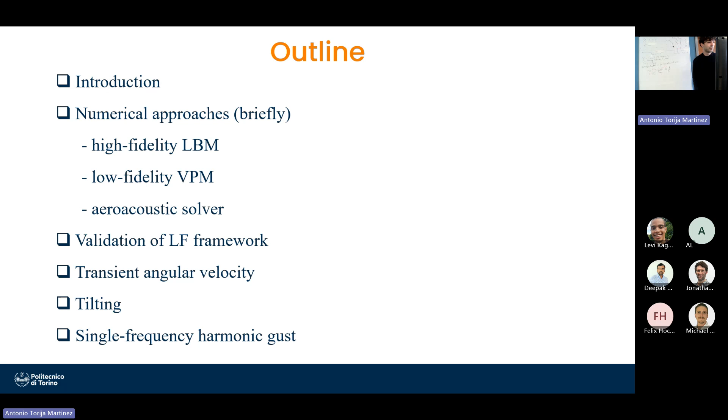I will start with a brief introduction and a description of the numerical approach we used in our calculations, the validation of the low fidelity framework, and then we will see some validation with respect to transient angular velocity conditions, tilting, and a single frequency harmonic gust for a single propeller.

Nowadays there's a lot of interest in urban air mobility, whose main goal is to improve mobility in cities with many applications ranging from air taxi to delivery by means of electric vertical takeoff and landing vehicles, which are vehicles capable of takeoff and landing in small areas, usually composed of multiple propellers.

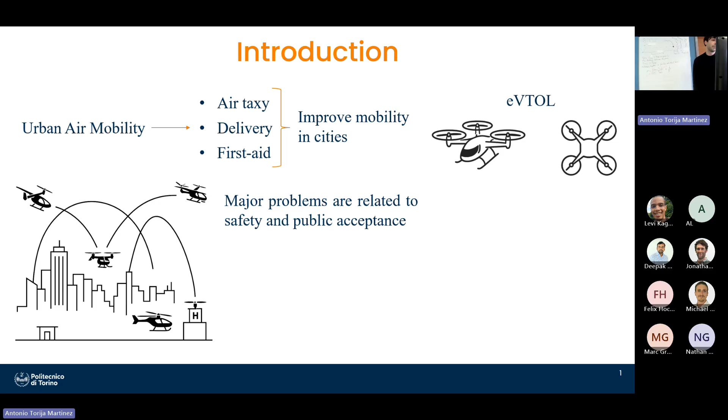However, in order to see a viable market, this relatively new concept needs to face and overcome some important challenges related to safety and public acceptance. In particular, there are many reports that suggest noise highly influences public acceptance.

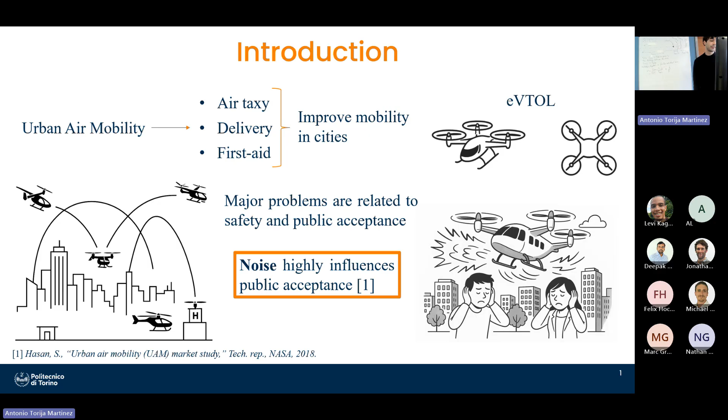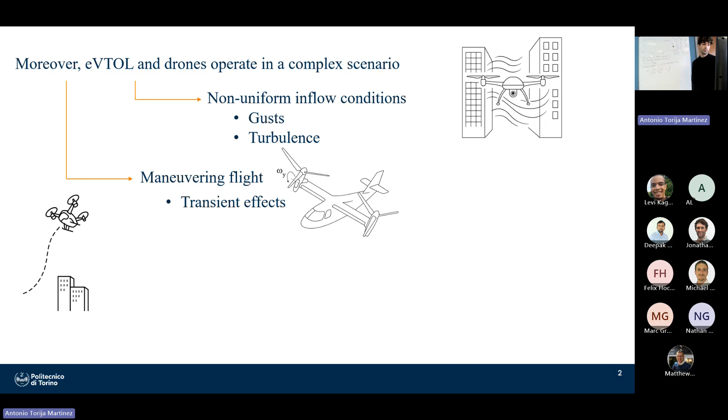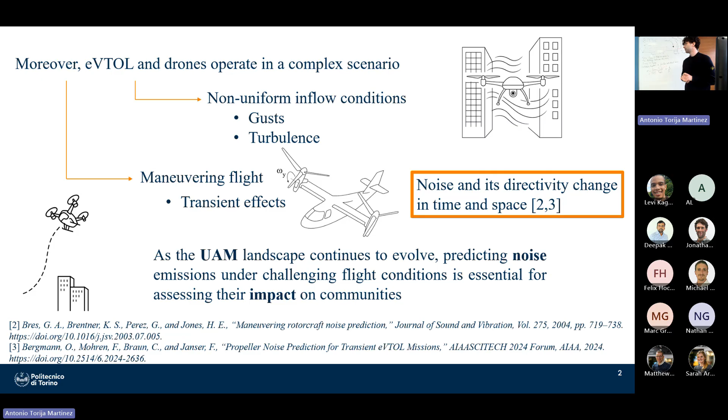Moreover, because these vehicles operate in a complex urban scenario characterized by non-uniform inflow conditions such as gusts and turbulence, and in maneuvering flight that cause transient effects during flight, which finally change the noise and its directivity in time and space, it's important to predict noise under these maneuvering and unsteady flight conditions in order to assess their impact on communities.

There are many numerical approaches adopted for this, ranging from low fidelity to high fidelity. High fidelity methodologies are based on high fidelity CFD simulations with, for example, large eddy simulation, direct numerical calculations, URANS, and lattice Boltzmann approaches, while the low fidelity approaches are based on simplified aerodynamic solvers and simplified versions of aeroacoustic solvers.

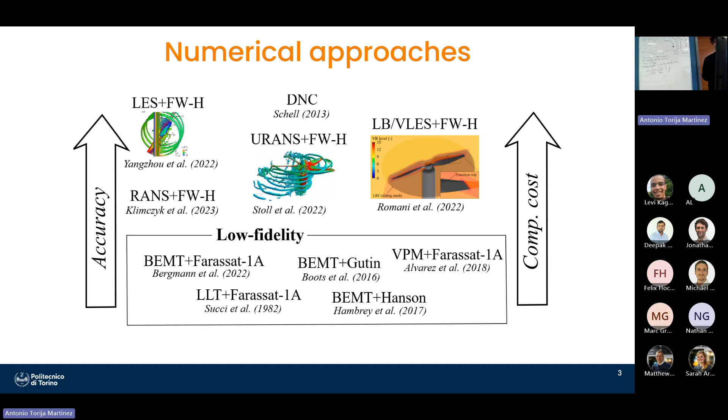Clearly, increasing the accuracy will also increase the computational cost. For this reason, it is infeasible to study complex maneuvers with complex numerical tools. I will describe just briefly the lattice Boltzmann very large eddy simulations.

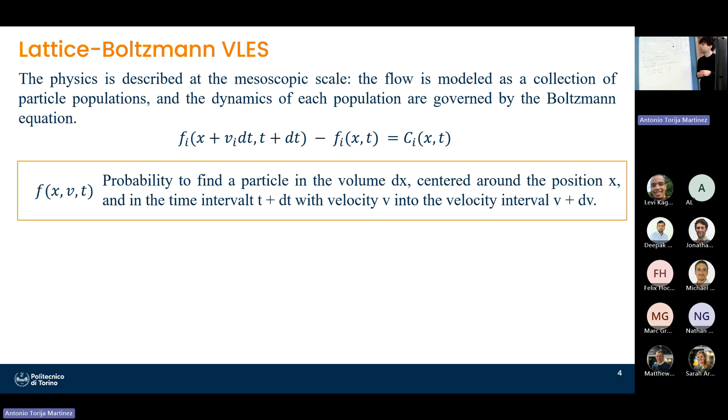With this approach, the physics is described at the mesoscopic scale. The flow is modeled as a collection of particles, and the dynamics of this population are governed by the Boltzmann equation. On the left-hand side, we have the probability to find a particle in a volume dx centered around position x, in the time interval t plus dt, and in the velocity interval v plus dv. On the right-hand side, we have the collision operator, which is modeled with the equation below.

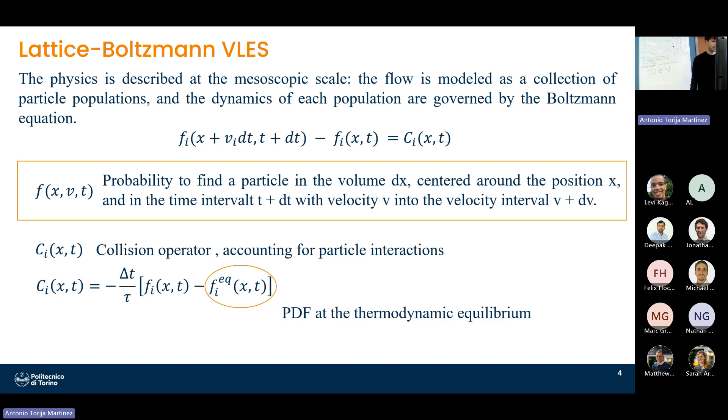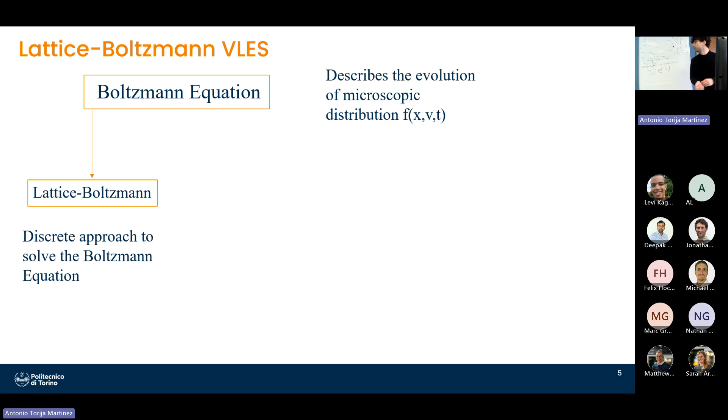So to understand the difference with Navier-Stokes equations: with the Boltzmann equation, we describe the evolution on the microscopic scale. The lattice-Boltzmann is the discrete approach to solve the equation, while the Navier-Stokes equation describes the evolution of macroscopic fields, such as velocity, pressure, and temperature, through the governing equations of fluid dynamics, which are the conservation of mass, momentum, and energy.

We can link the Navier-Stokes to the lattice-Boltzmann if the Knudsen number, which is the ratio between the microscopic scale and the reference length of the problem, is much less than 1, so you can use the continuum assumption. This is usually done by asymptotic expansion, so from the Boltzmann equation we can get to the Navier-Stokes equation under some constraints.

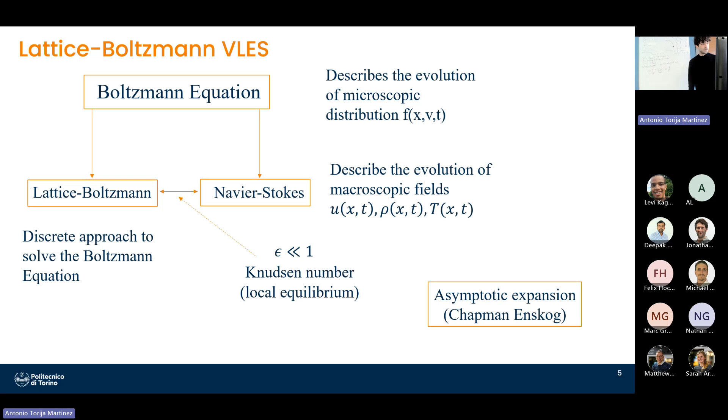Regarding low fidelity, variable fidelity methodologies, we have the vortex particle method we adopt in our low fidelity framework. This method describes the particles with a Lagrangian approach that tracks the evolution of the circulation of the particles.

Basically, it discretizes the Navier-Stokes momentum equation in its velocity-vorticity form, so it becomes like a balance of angular momentum. On the left-hand side we have the evolution of the circulation of each particle, and on the right-hand side we have the convection, contraction, and expansion of the particles, the effects of multiple particles on each other, and the effects of dissipation with the advection and strain pairs.

In general, we use an open source vortex particle method. It's a reformulated vortex particle method because it adds some terms that enhance the continuity equation, and so the balance of angular momentum, and also adds the subfilter model, which is the last term on the right, which can model the dissipation of the vortex.

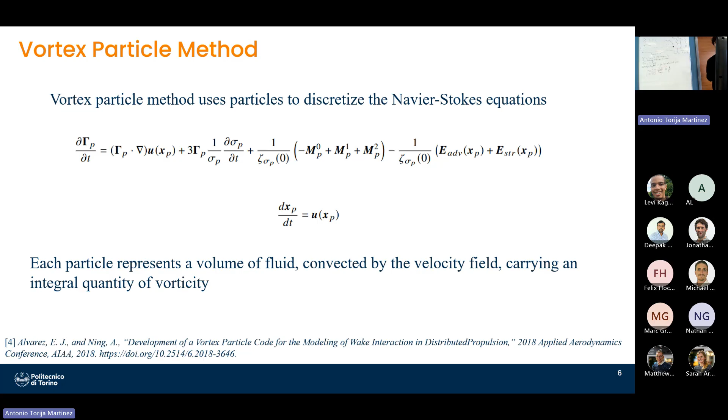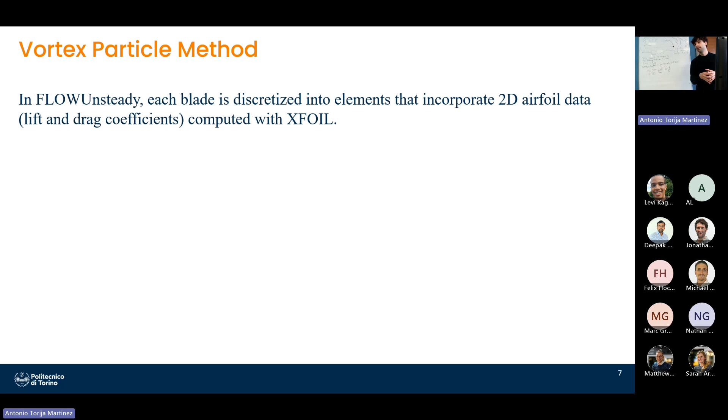In FLOWUnsteady, each blade is then discretized into blade elements that incorporates 2D airfoil data, such as the lift and drag coefficients. And then with the Kutta-Joukowski theorem, we can reintroduce this circulation in the flow field based on the load distribution on the blades.

Clearly, the high accuracy of the method has already been validated a lot in the literature with different test cases with multiple VTOL designs, but its high accuracy and low computational cost makes it a good solver for the VTOL design and study of different types of architectures.

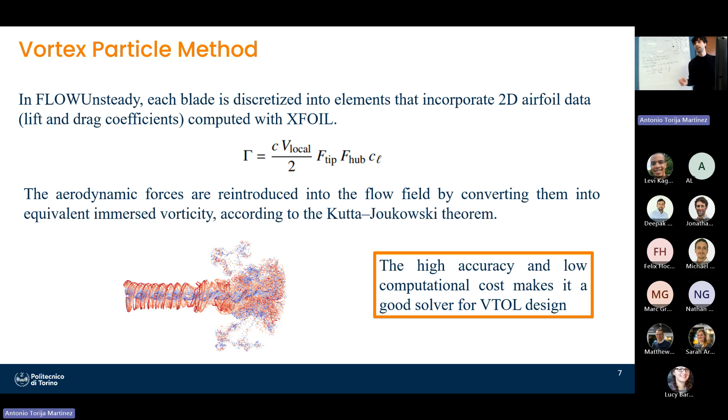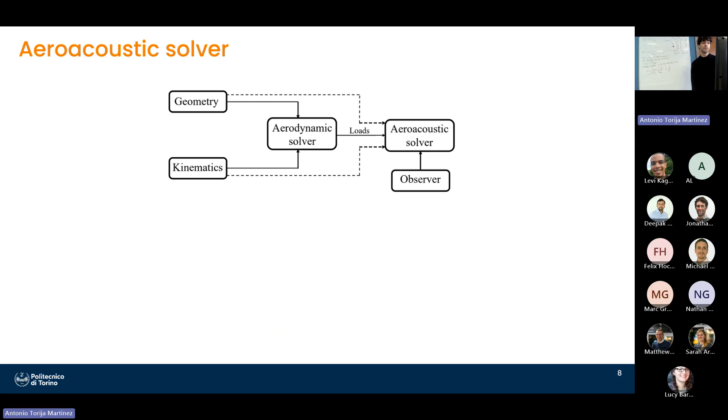Then we couple the aerodynamic solver with an acoustic solver we developed in-house based on the Farassat formulation. The Farassat formulation is a time domain approach. It's based on the Ffowcs Williams-Hawkings analogy for a compact dipole monopole source.

Basically, we evaluate the integrands at the retarded time, where we have three main time grids: the emission time grid, where the signal is emitted from each blade element; the observer time grid, which is the time at which the receiver perceives the sound; and then the retarded time, which is reconstructed solving this implicit equation. So basically, fixing the observer time, you can reconstruct where the blade was when it emitted this specific signal.

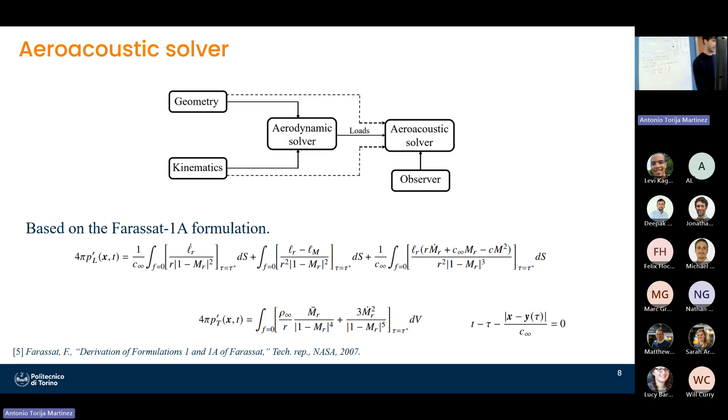Then, for considering also the kinematics of the solver, we solve each equation for each blade element, each blade, for each time step, so we can have a description of the translational and rotational motion of the propeller.

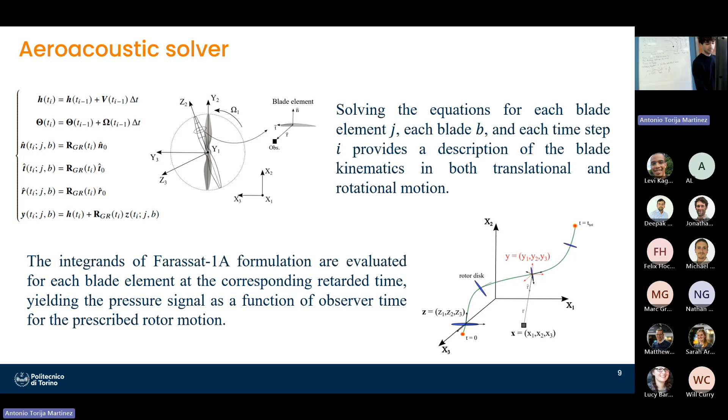So we can finally have a pressure signal that is a function of the time and the position of the rotor and its attitude. So this is basically how it's coupled. We have this pre-processing block, and the processing with the aerodynamic and acoustic solver, and then we post-process the pressure data. Here, clearly, only the tonal noise is computed.

We neglect the broadband. We neglect the quadrupole term because for our application, the Mach numbers are very low, so the quadrupole can be negligible, but we don't have a broadband model for the low fidelity approach, not for the transient.

We validated with respect to high fidelity and experimental data from the literature. Here you can see thrust, torque coefficients, and the efficiency of the propeller as a function of the advance ratio. This is the ratio between the free stream velocity and the rotational velocity of the propeller in RPS multiplied by the diameter of the propeller.

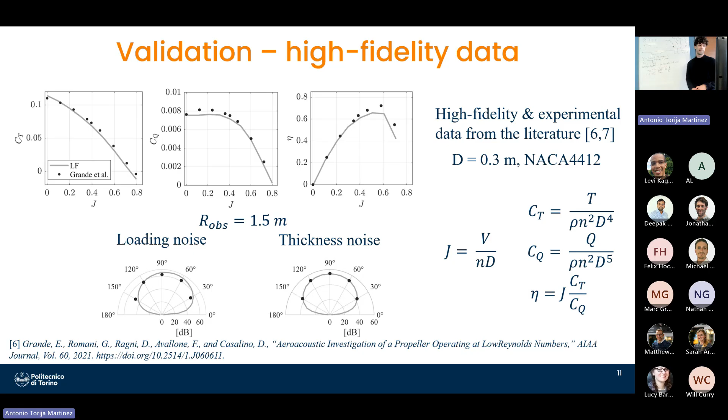And then we compare also with this data from the literature, the loading and the thickness noise, with comparable results. Then we compared in a cross-flow configuration for the data also in the literature in the article below. And in cross-flow, we consider a condition in which the free stream velocity vector is inclined with respect to the rotational axis of the propeller.

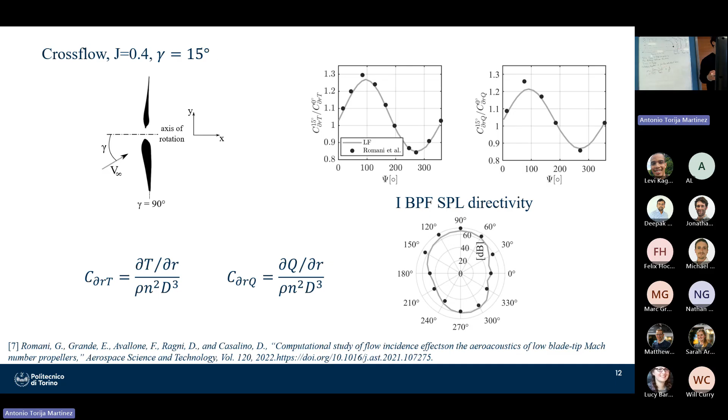So we have a load imbalance during the rotation of the propellers with some sound pressure level directivity that clearly changes its shape from dipole to something more, less symmetric.

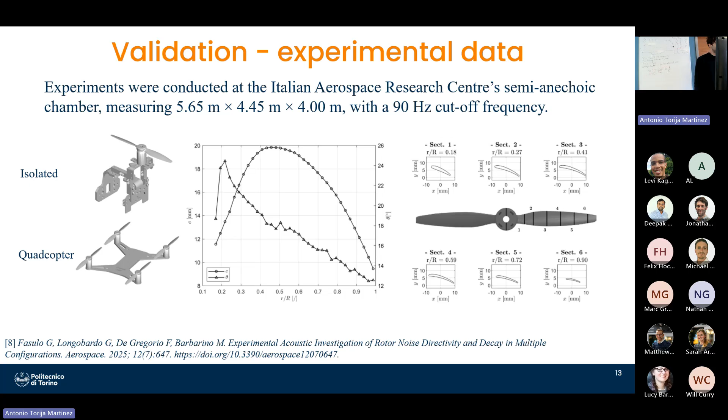We then validated with respect to experimental data. Here I will go a bit faster. We consider again the aerodynamic performance. Also in this case, we have good agreement with the experimental data, except for the torque, which is difficult to capture, especially for low Reynolds number propellers, where with a low fidelity approach you can't capture the actual fluid dynamic effects.

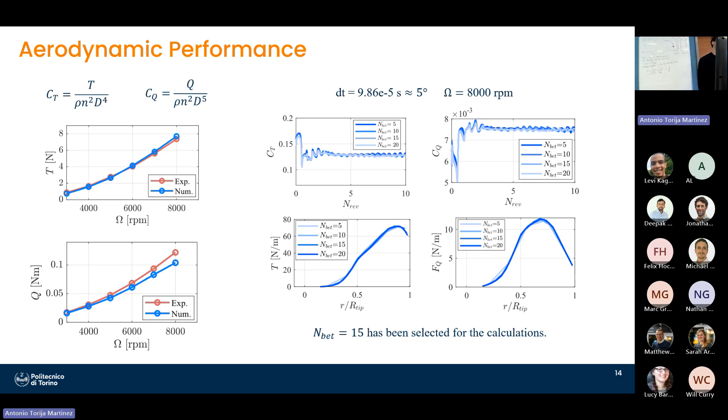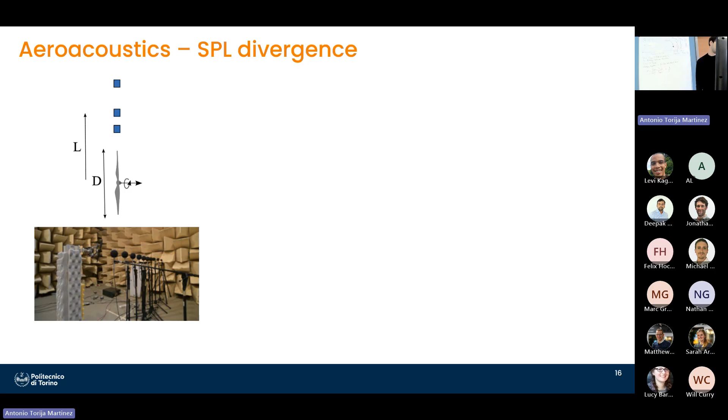That appear on the propeller. Then we measure some sound pressure level for different microphones in an array, circular array. So in this case, some sound pressure level directivity is in agreement with the experimental data for the first blade passing frequency. Then we consider some sound pressure level divergence to observe if the near field, far field terms are in agreement with respect to the experimental data.

And yeah, also in this case, we've seen a good agreement.

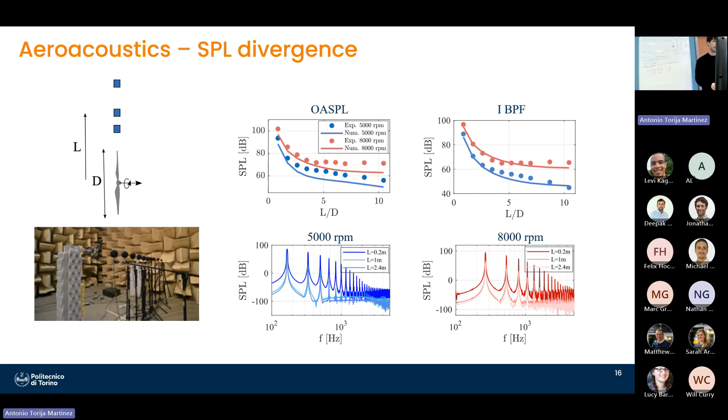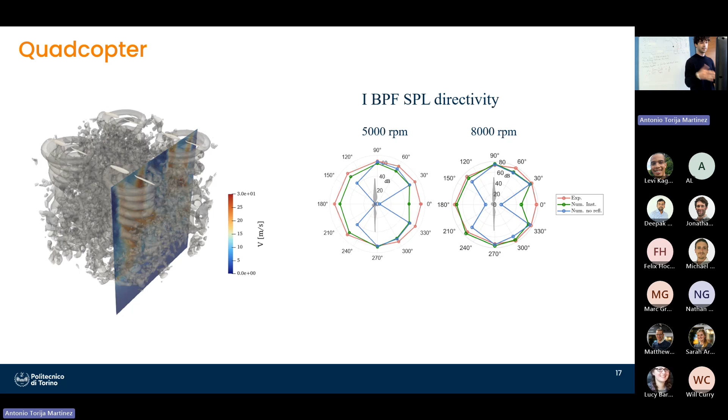And then we compare it for a complete quadcopter, only the first BPF, considering the installed configuration both for the experiments and for the aerodynamics. Clearly, with the low fidelity approach, we don't simulate bluff bodies, we can only simulate interactions between lifting surfaces.

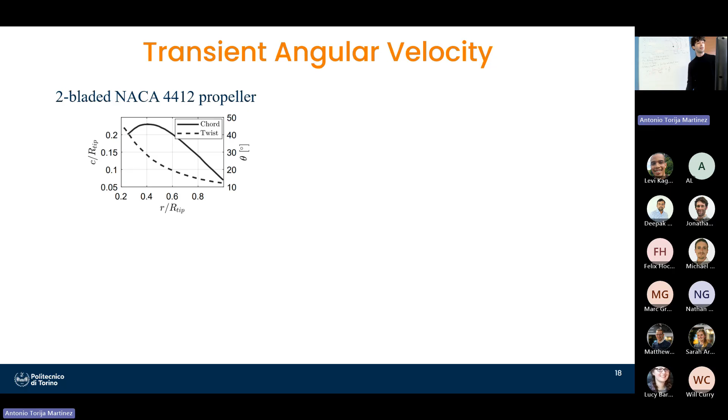The minimum voxel size, which is the size of the cell, is 78 microns. We performed a mesh-independent study, and we chose the finest mesh. We compare the results for the initial condition.

Here we perform a transient angular velocity from 5,000 RPM to 6,000 RPM. We compare the loading distribution along the radius and the force that produces the thrust.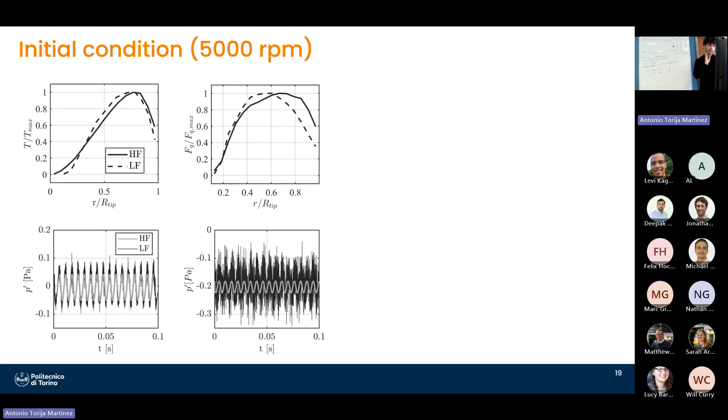We compared also the pressure data for two different observer locations, in the plane and out of plane. Clearly, out of plane, the broadband dominates the pressure field, which is not captured by the low-fidelity approach.

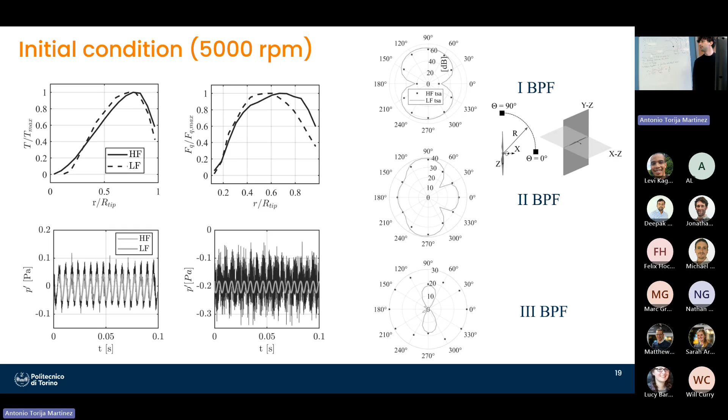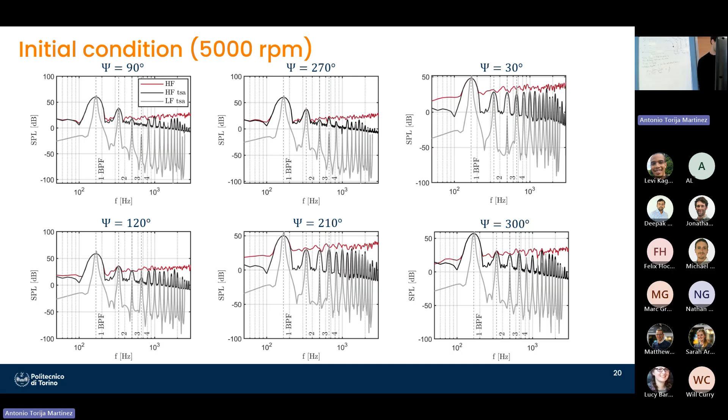Here, the high fidelity, the red one, is the total high fidelity spectra, considering also the broadband. The other two are performed with time synchronous phase averaging.

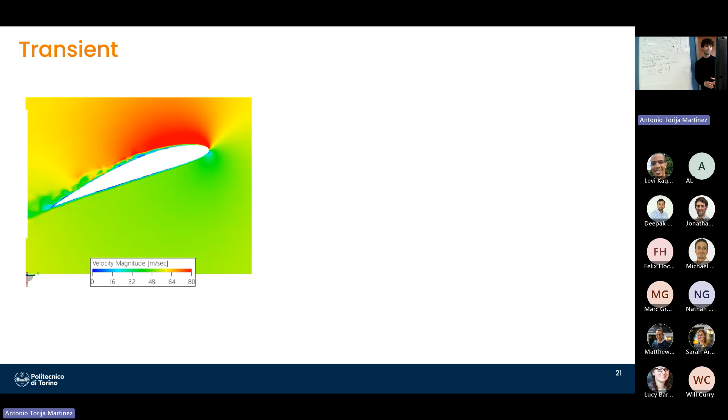Clearly, during the transient, the velocity increases. Here it's just a video of the increase of velocity with the rotating propeller. We can see the complex fluid dynamics in the regime, because we can see a laminar separation bubble, which affects the noise and the aerodynamic performance, which is not captured in the low fidelity approach. And this laminar separation bubble moves, increasing the velocity.

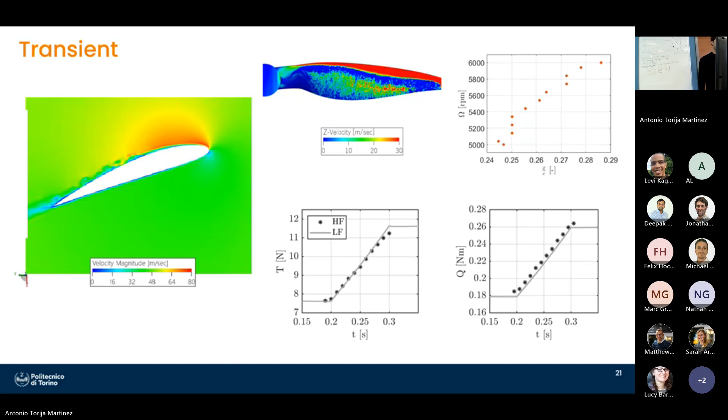But considering the total thrust and the total torque, we have also a good agreement between the high fidelity approach and the low fidelity. And also for the pressure signals, here we consider the acoustic pressure as calculated by Farassat. However, our main goal was to compare the shape of the pressure signal for different locations with respect to the high fidelity data.

Here it's included, you see for an observer close to the propeller axis, we have this mean, which is not being subtracted here because it's related to the variation of this mean, which is not acoustic. But we wanted to compare the shape and what drives the shape of the pressure signal.

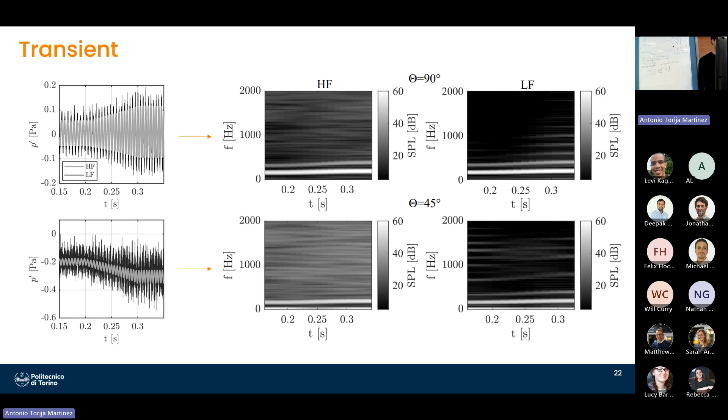Here we consider the forces, so what happens to the forces in a global reference frame, fixed with the inertial reference frame, fixed with the observer. We can see that the components of the forces, the components of the drag forces, change and increase during the transient, and also the thrust.

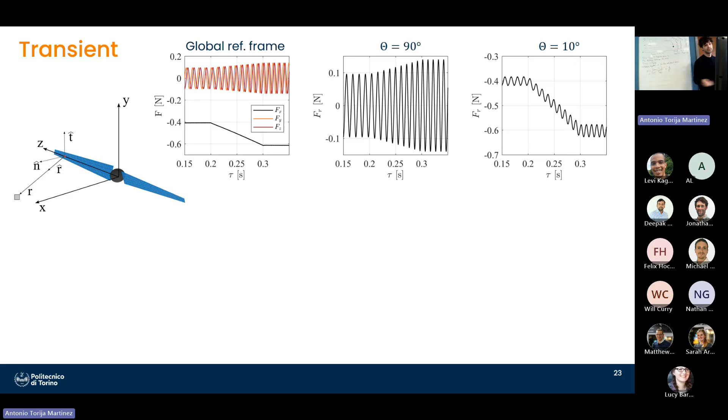However, what's important, what comes in the equation is the radiation force, which is the force that the observer actually feels, projected in the radial direction with the observer. We see it in the plane, mainly dominated by Fx and Fy, which are the components of the torque of the drag, because the thrust is orthogonal to the radiation vector in that direction, so it doesn't account in the equations. While for an observer closer to the propeller axis, we see that the thrust shapes become dominant.

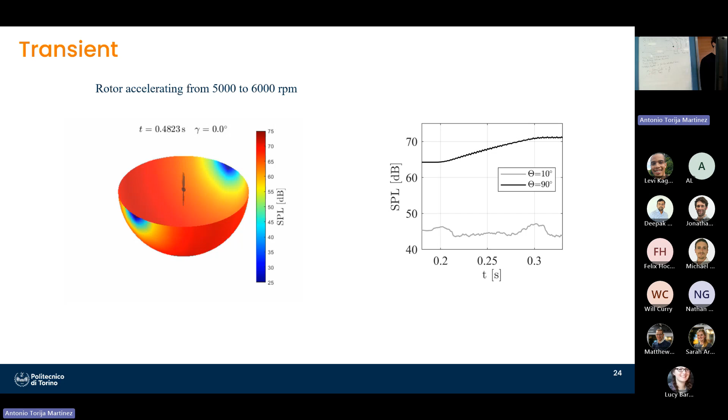Here it's just a video showing the rotor rotating, increasing the SPL, and we see the increase in SPL at the beginning and end of the transient for an observer close to the propeller axis. This is mainly due to the thrust variation. While for an observer in the propeller plane, the torque variation is relatively small, so we can't appreciate large differences or overshoots.

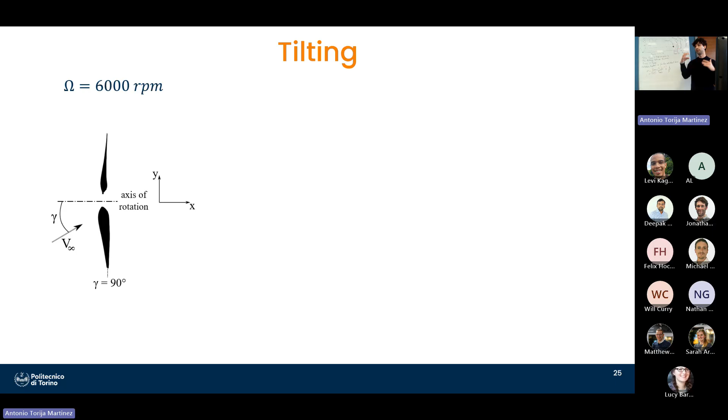Considering tilting, we studied firstly the tilting. Tilting is a change in attitude of the propeller, so it rotates along another axis, not only the axis of rotation, but it's also changing the attitude. We studied first a static tilting, which is just inclining the free stream vector with respect to the propeller, which is the same as inclining the propeller with respect to the free stream vector.

We populated a map with aerodynamic performance of these conditions. We can see for fixed tilting angles, in particular for gamma equal to 0 -- here I reported it with alpha, but it's gamma -- that the thrust coefficient decreases, increasing the axial velocity, while it increases the tilting angle.

Here we can see also the root mean square. In particular, it decreases, increasing the free stream velocity, but in the hovering case we have an increase because it's also a challenging configuration, since the rotor encounters its own wake and the tip vortex doesn't travel fast in the wake.

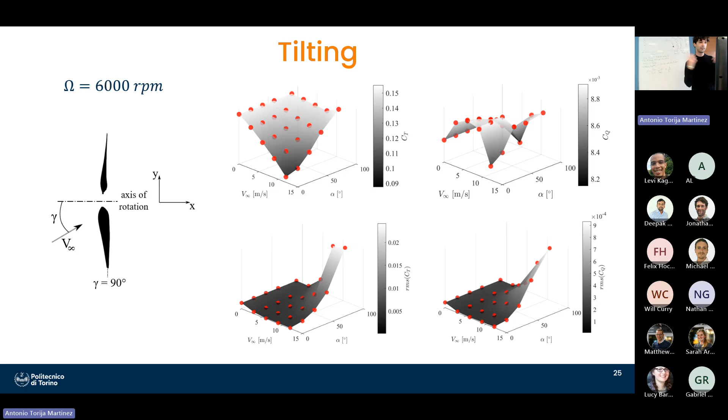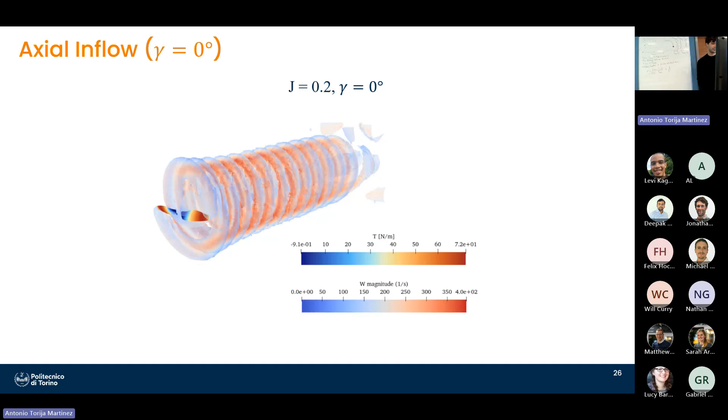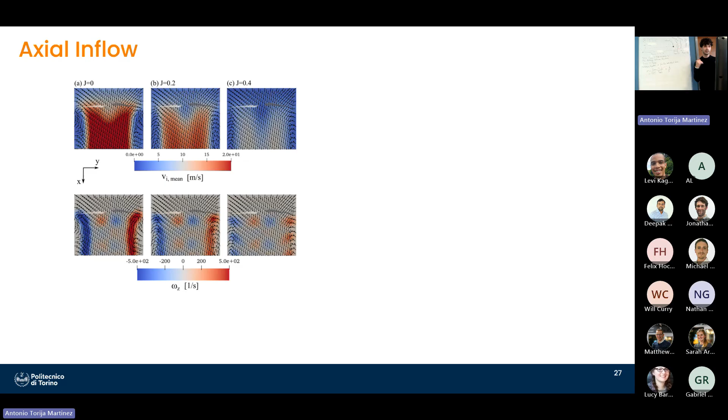Here it's just a representation of the flow field for J equals 0.2, an advance ratio of 0.2, in axial inflow condition. We can see that increasing the axial velocity leads to a reduction in the induced velocity, and the tip vortex becomes weaker, as can be seen from the figure on the right and on the left below. Also, the tip vortex travels faster.

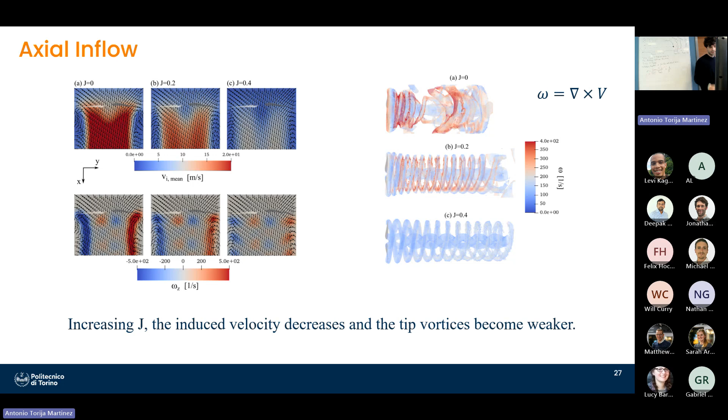This can be explained using blade element theory. Here, the total relative velocity is composed of the axial velocity and tangential velocity with respect to the airfoil.

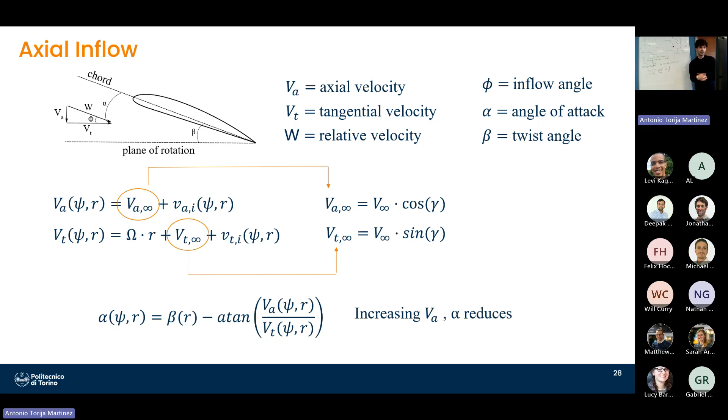Clearly, the axial velocity and the tangential velocity depend also on the free stream vectors and on the induced vectors by the loads and loading conditions. With the tilting, the free stream vector is inclined, and the axial and tangential velocity affect the angle of attack, which finally affects the thrust and the torque.

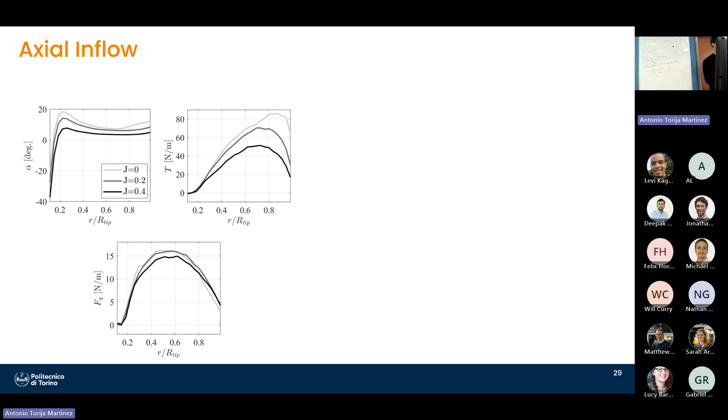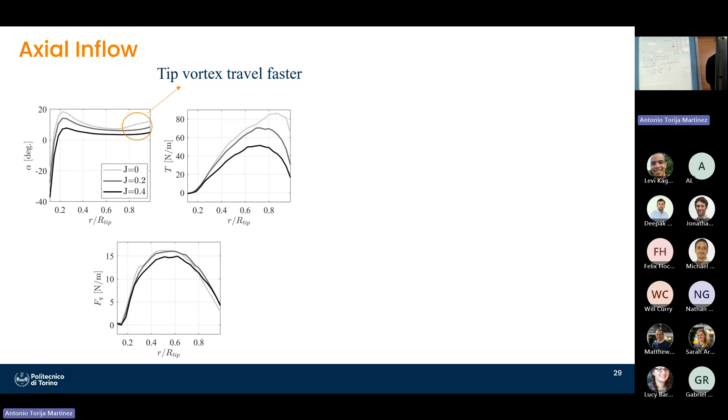We can see this by observing the radial distribution of the angle of attack for different axial velocities. The induced velocity by the tip vortex that reduces the axial inflow becomes weaker as the advance ratio increases, and the thrust also reduces along the blade, while the torque is not really affected. We have an axisymmetric distribution of the thrust and the torque.

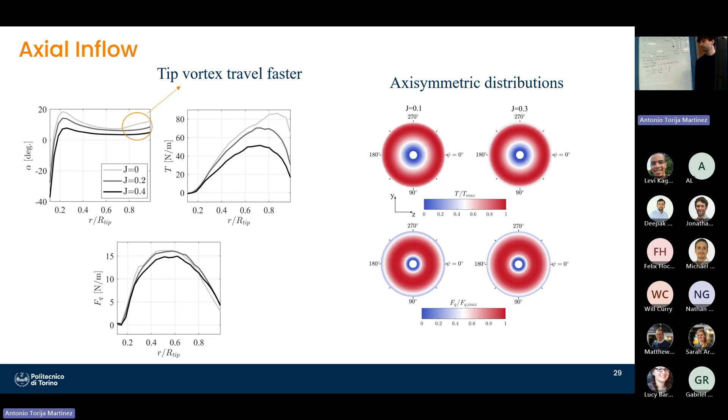Considering the acoustics, changing the advance ratio for an observer placed in the plane of the propeller, we don't have much difference because the torque is not highly affected, while for an observer close to the propeller axis, the thrust again dominates the radiation force. Increasing the advance ratio changes the SPL along the propeller axis, because for low advance ratios we have a fluctuating part in the thrust coefficient caused by the wake congestion of the propeller.

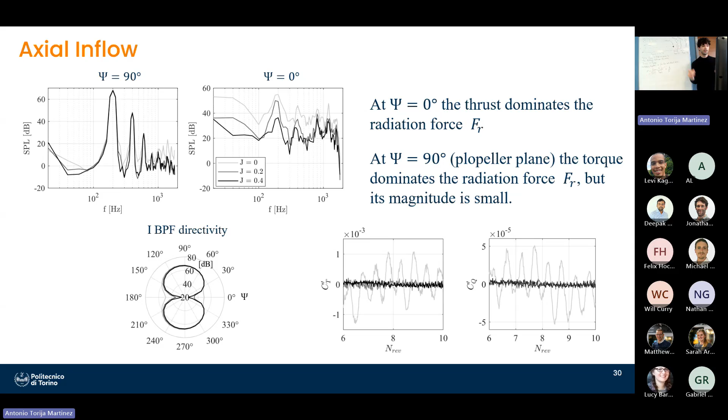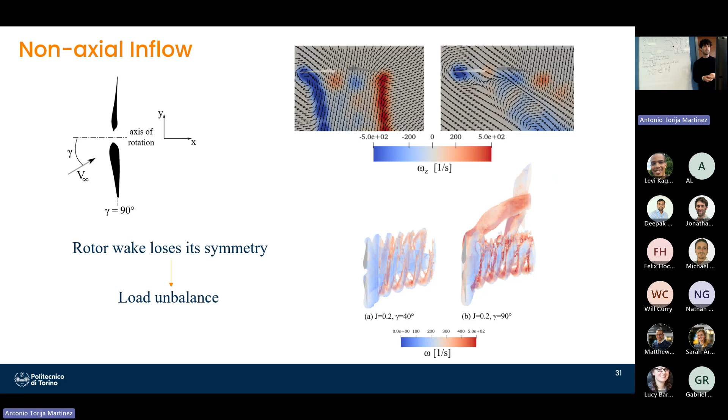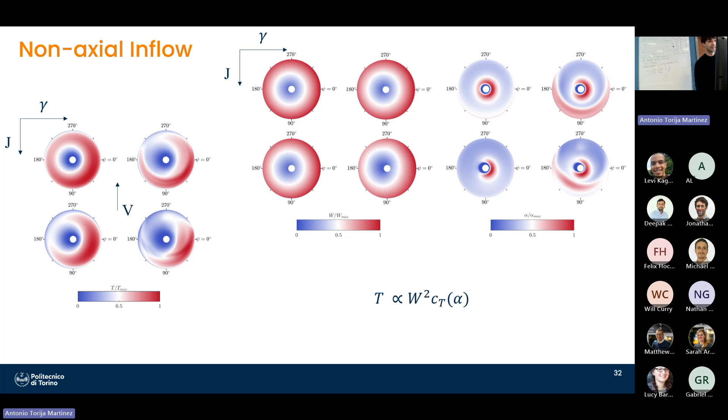Tracking an interval along the blade for varying azimuthal location, we can see for different inflow configurations that the peak of the thrust is mainly unaffected. For J 0.4, a high advance ratio, we have this effect observed also in this figure: an increase of angle of attack, which is affected by the reduction in axial velocity based on blade element theory.

So basically, the thrust follows the contribution of the relative velocity and the angle of attack.

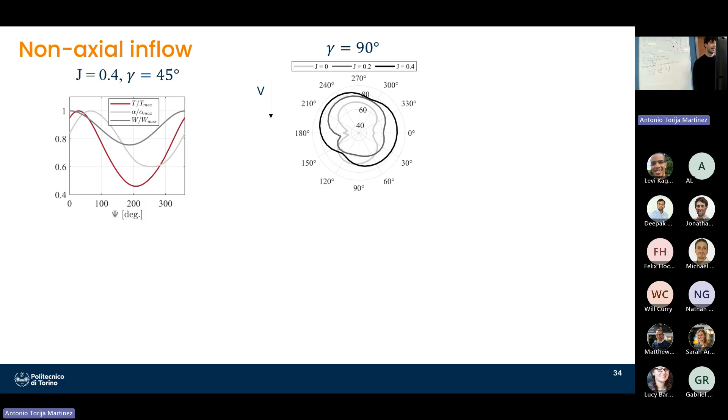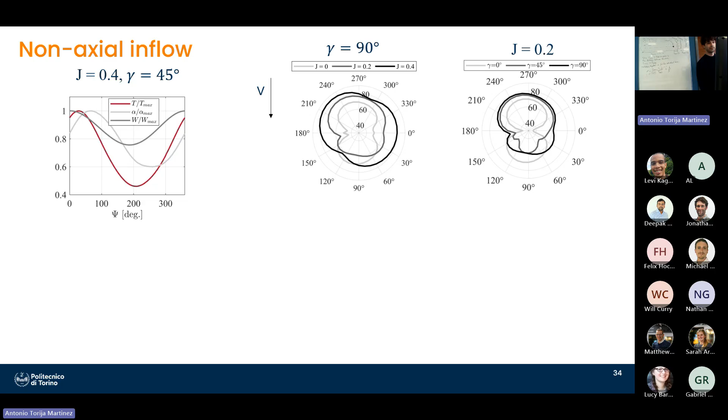The sound pressure level distribution clearly differs from that in axial inflow. As J increases, we have an increase in SPL along the propeller axis, and also fixing J, we have a different shape when varying the tilting angle.

Okay, finally we perform the dynamic tilting: a tilting in which the propeller changes attitude in the hub axis, so it doesn't shift, it's just tilting along its hub.

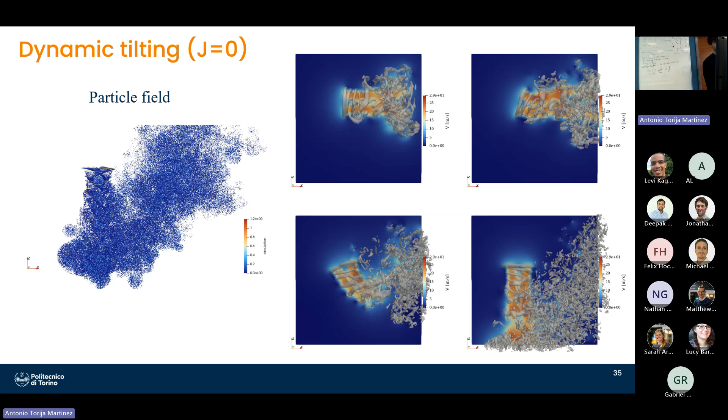We have a load unbalance here also in this case during the transient. This is performed in hover, so we have this wake ingestion that highly influences the thrust coefficient of the blades.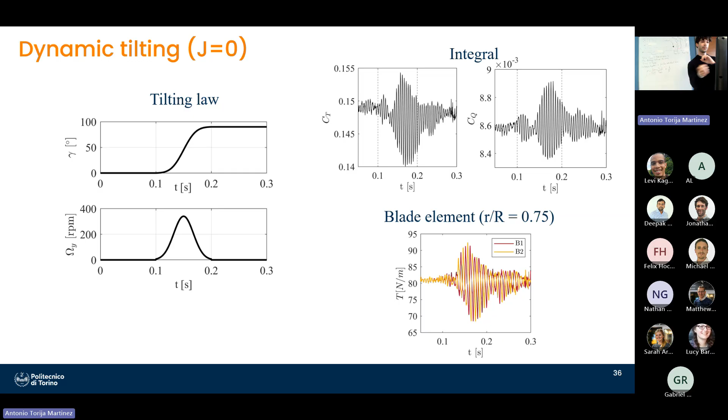We see that also with a single blade element, we have the shift. It's oscillating in counterphase between the two blades, because one encounters the wake while the other encounters the clean flow.

Increasing J, so with tilting in forward flight, we have that the thrust coefficient starts to oscillate higher than it was for J equal to 0, and also the torque coefficient.

Here we have a representation of the tilting in hover. It changes the orientation of the lobes, and similarly for forward flight.

In this case it's more dramatic, with a bigger increase in sound pressure level on the advancing side of the propeller. The flow is coming from this side.

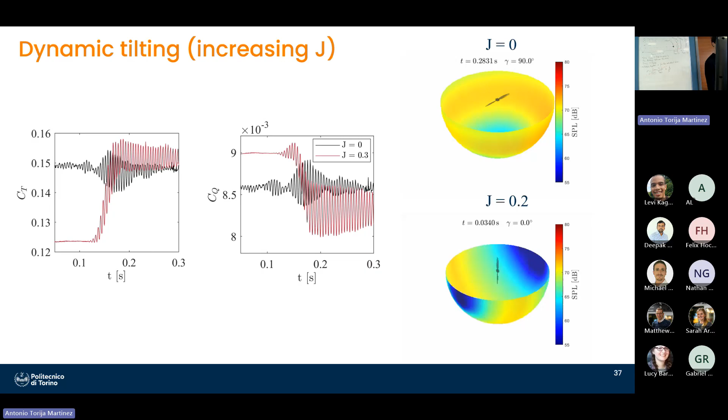If we consider a plane, here a plane is considered, so we can see the result in the figure for Psi equal to 0.

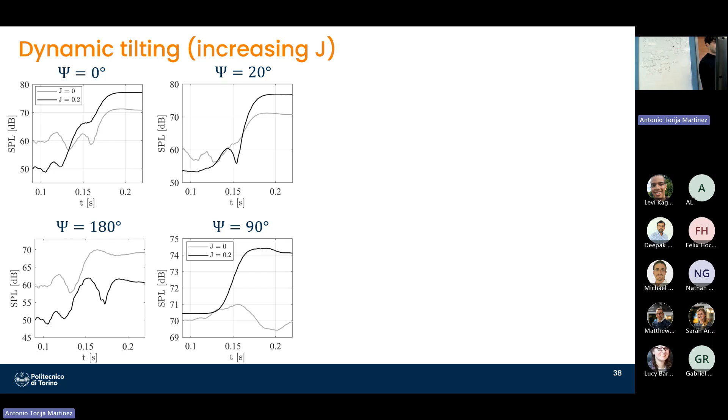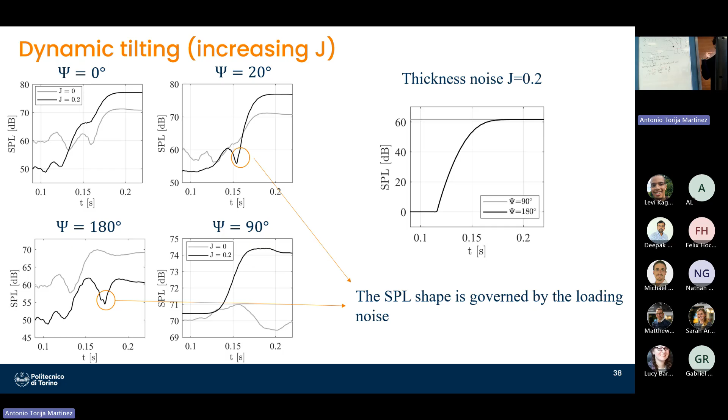Approaching the propeller axis, we have these undershoots, which are governed by the loading noise, because the thickness noise doesn't have interesting shapes for an observer in the propeller plane, which always sees the propeller in its plane. The thickness noise is constant, while it changes if the observer is placed behind the propeller, while the propeller is tilting.

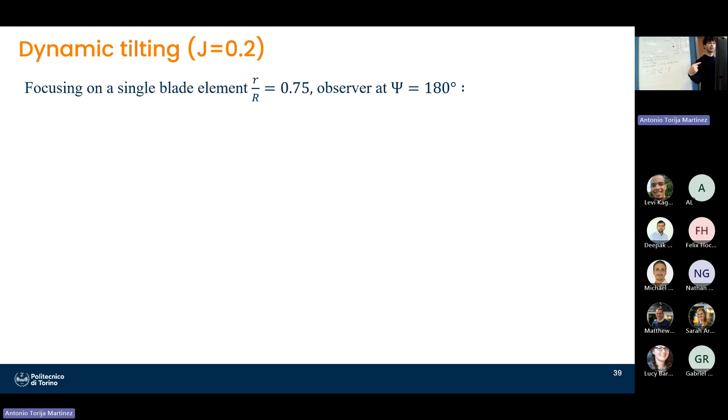If we focus on a single blade element for an observer behind the propeller, along the propeller axis, we can see the global forces and how they change, but we're more interested in the radial force.

To explain this undershoot, we saw that the main actor is the derivative of the thrust along the radial direction, which has this undershape, appearing in the far field term of the Farassat formulation, which is represented here.

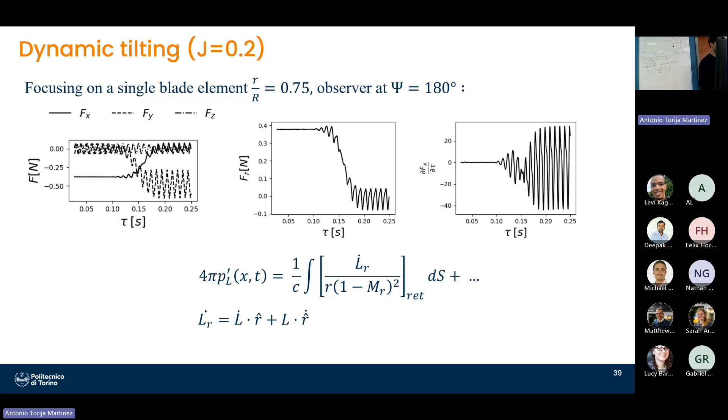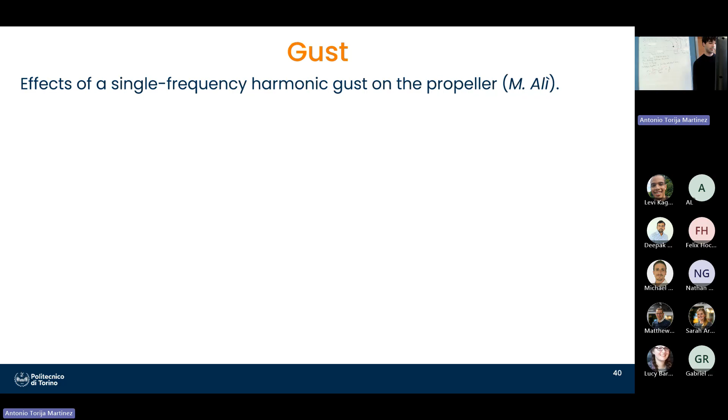And this is still going. We are studying the effect of single frequency harmonic gust on a propeller. It's being done in collaboration with people from Delft, and Mario from Turin. We performed high-fidelity simulations with a single frequency harmonic gust and different wave numbers.

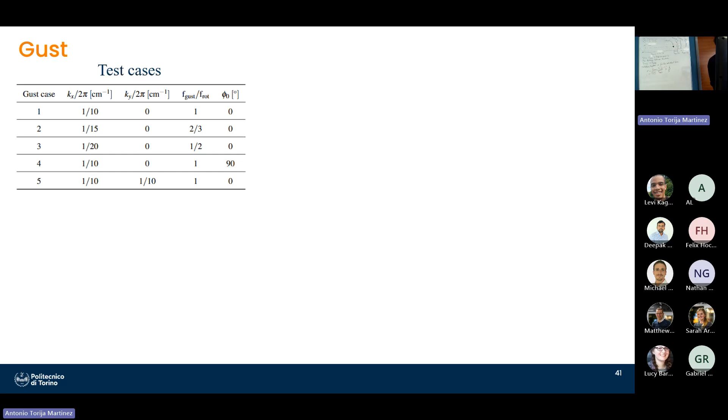Here is the test matrix. I report just one configuration, case 4, which is the gust with a phase shift of 90 degrees, so it's following the blade rotation, with a frequency of 100 Hertz.

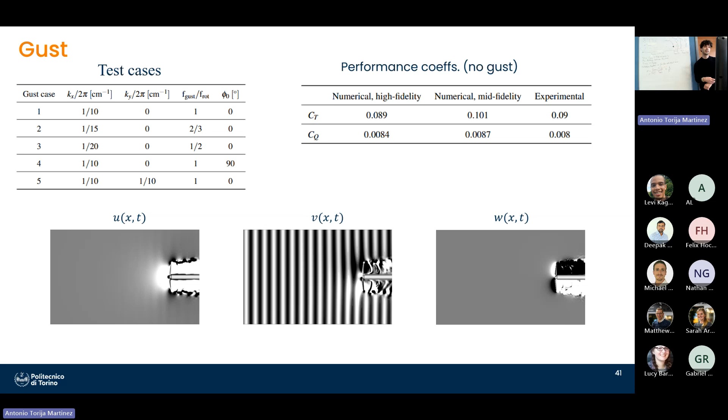We compare the results with the steady configurations. This is the representation of the flow field. We see that encountering the gust causes the blade to oscillate in counterphase: one increases the mean CT, one decreases the mean CT, because they encounter different inflow conditions, but they're synchronized with the gust. So one blade always encounters an increase in velocity, and one blade always a decrease in velocity.

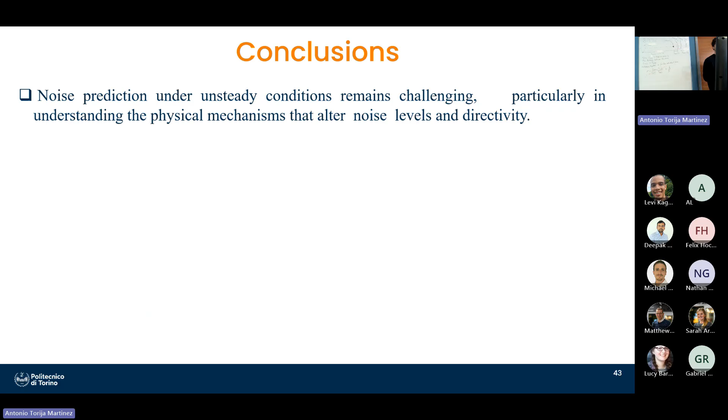Then we will study more different types of gusts and so on. So to conclude, noise prediction under unsteady conditions remains challenging, in particular in understanding what physical mechanism alters the noise levels and its directivity.

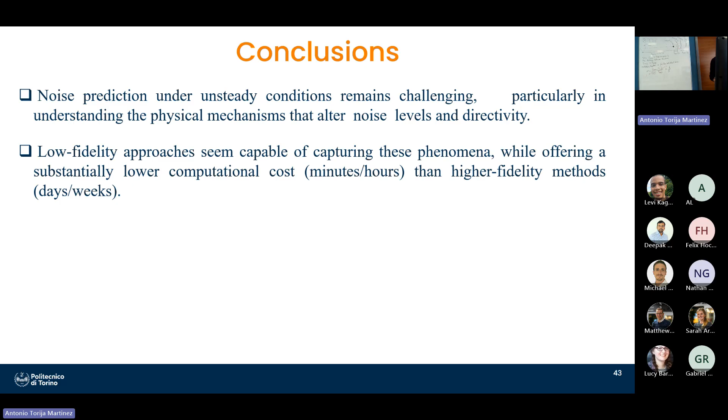Low fidelity approaches seem capable of capturing these phenomena, offering a lower computational cost in minutes or hours with respect to days and weeks of Lattice-Boltzmann simulation and months of Navier-Stokes simulations. A major drawback of the low fidelity approach is that the broadband contribution is not included, and it is difficult to model in a transient condition.

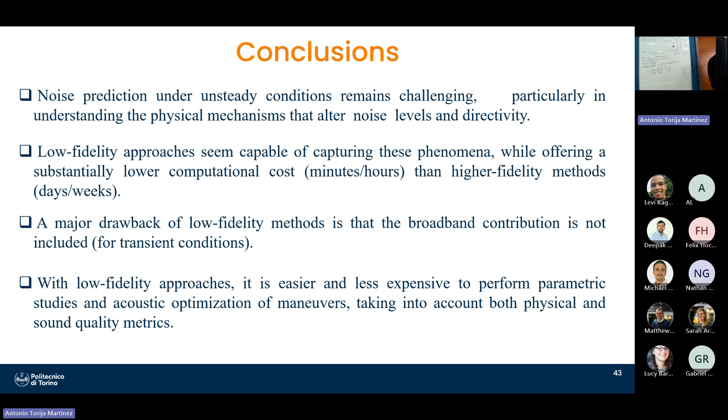But also with these low fidelity approaches, it's easier and less expensive to perform parametric studies and acoustic optimization of maneuvers, taking into account physical noise metrics and sound quality metrics. Also, it's not clear what the reference configuration of the VTOL is, or what the flight path is. So in order to perform a parametric study, I think it's better to do it with low fidelity approaches. With that, I conclude, and thank you for your attention.